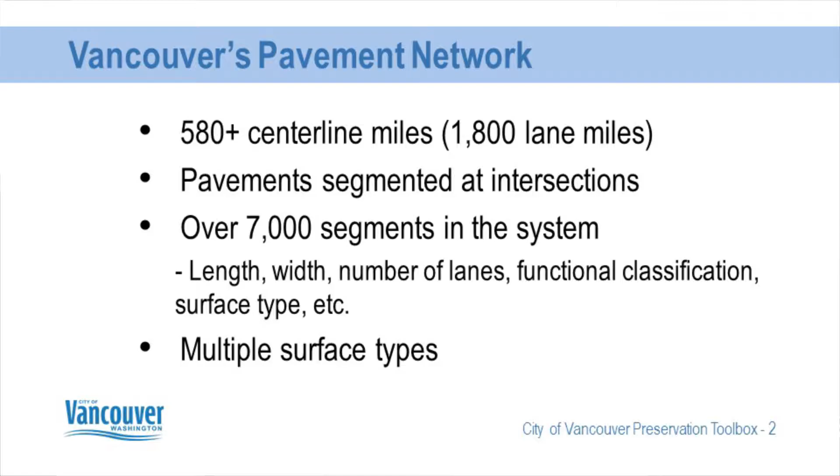Instead of like a route milepost, we do intersection to intersection in the city. It's just easier for us to manage our system that way. Because of that, we have approximately 7,000 segments and multiple surface types, but the majority of our surfaces are asphalt. We're like 97% asphalt. So just to talk about our pavement program in general, to try to tailor a little better with the topics, how they're presented.

We've used multiple pavement management systems over the years. Currently, we're using StreetSaver. The Hansen Infor, we tried that a few years back. Our Public Works uses that as their maintenance management system. It does some general analysis for the assets, but it just wasn't robust enough to have the long-term forecasting we needed for asking for additional money.

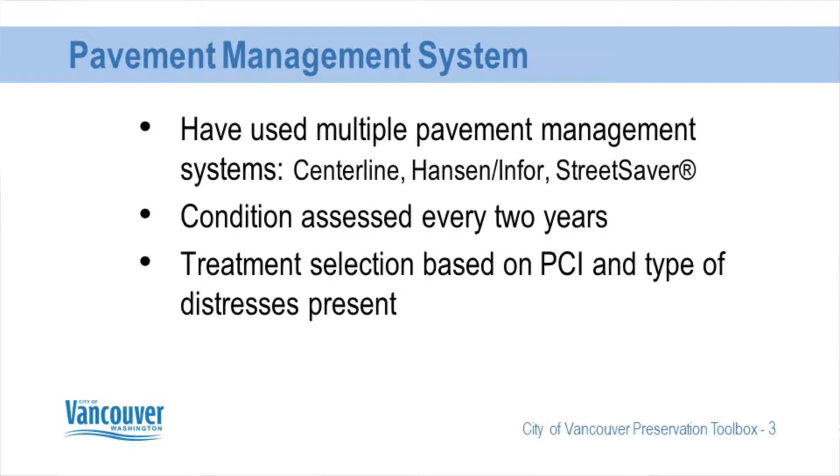We assess the condition of our streets every 2 years, and basically our treatment selections are based on the PCI. As I mentioned a few minutes ago, we don't do IRI or get some of the roughness numbers to select our streets, so we're really using predominantly the PCI, and then we take a look at the distresses when we get a little more into the weeds with it. But structural data, things like that, we get more on a project level than a network level.

So just for a frame of reference for our program, in '17 we actually got additional funding for our program, an additional 3.6 million. So we have 10.4 million this year, which included that additional funding. With that, we did a whole lot of ramp work because in the city and urban area, sidewalks are a big deal. So out of that 10.4, we spent roughly 1.6 million on ramps this year. It took a good chunk of our budget, but it's just part of doing business anymore.

23 lane miles of it were rehabilitation work, which would be related to any kind of overlays or any kind of asphalt on the ground for us. And then 115 lane miles of preservation surfacing type work.

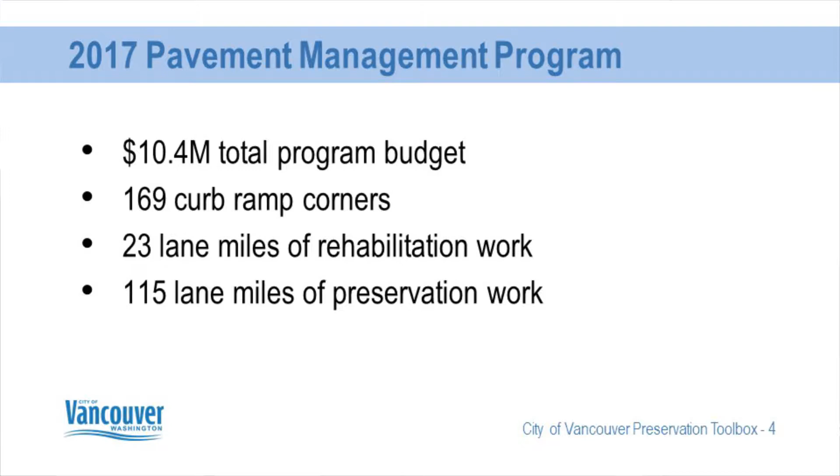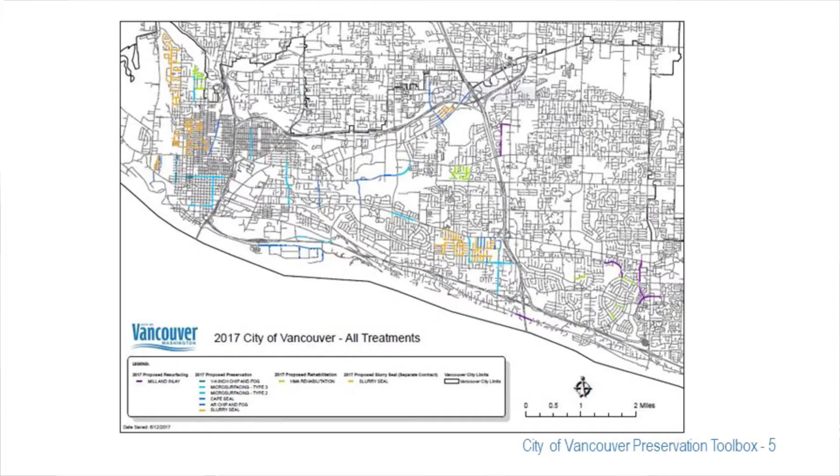The next slide is really just a map of the city and a little bit of a view of where we did work. It's kind of hard to read, so if you've been to Vancouver, maybe you care. If not, it's just a map, but we try to spread our work around through the whole city as much as we can.

We really try to split our system into east and west of I-205, and we do our preservation treatments typically on one half each year, trying to group projects together to make it more productive for contractors coming into the area so they don't have as many stockpile sites and whatnot.

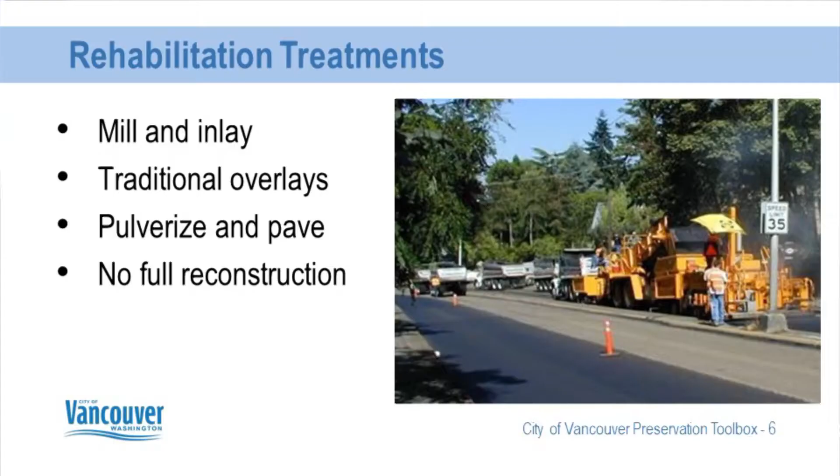To talk a little bit about our rehabilitation, we do traditional mill and inlays, overlays, some limited pulverizing and paving, mainly on residential streets right now. We've got a lot of old, thin asphalt streets that need work, so we do that on those versus our arterials. Currently our program is not based on full reconstruction of our roadways. We talk about worst first, what's going on with that. In a few years we'll start getting to that.

Our funding really is set up so that 10.4 million has the goal of trying to maintain our condition over time, with a slight bump as we move along to increase the condition of our system. Because prior to that we had about 7 million, and we maintained our arterials, but as our Public Works director called it, we had the streets death panel that oversaw the slow bleeding deterioration of our system over time. So with this additional funding, we're maintaining.

So what preservation tools have we used? We've used a number. Apparently, we've got some catching up to do with the city of Roseville to get to the number of treatments they've tried, but we've done traditional slurry seals, microsurfacing, chip seals, cape seals, and a few other treatments that we've either used or are looking at using in the near future.

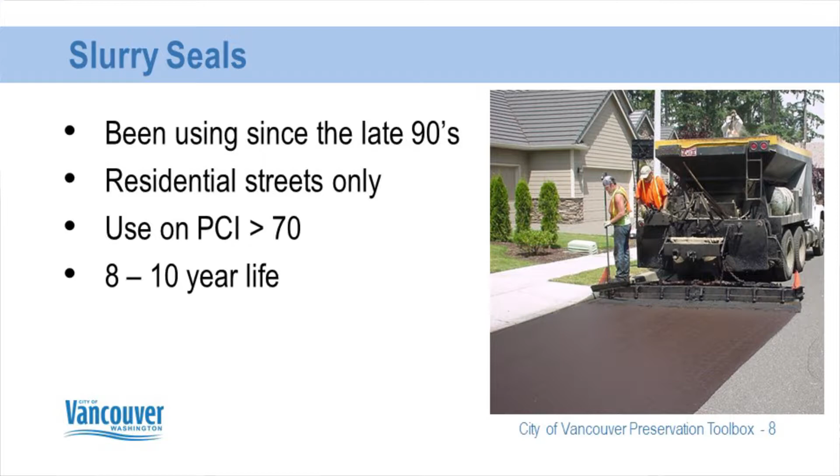With slurry seals, we've been using that the longest. Been using that since the late 90s, residential streets only. We tried them on some arterials, but just with traffic and whatnot, the slurries wouldn't hold up to it, wore through, weren't successful. So for a number of years, it was either a slurry on a residential street or some kind of paving on our arterials.

While we have used it on streets that are much lower than a 70 for our PCI, really for us, ideally to get the life and the amount of prep and whatnot, 70 is our target range, kind of bottom end, where we use slurries. And in terms of the overall life, 8 to 10 years is kind of what we plan.

Because of funding and how long they've lasted, they really go beyond 10 years a lot of times on residential streets, just because of the amount of prep we do in advance and because there's hardly any traffic. But our goal is now to really get into that 8 to 10 year repetitive cycle to stay on top of our pavements now that we have the additional funding.

Microsurfacing, we started using that in 2009, as just mentioned. Prior to 2009, we had slurry and paving in our toolbox. We were looking at something on arterials that we could use, some kind of preservation treatment. So we looked at micro as an option. We worked closely with the contractors.

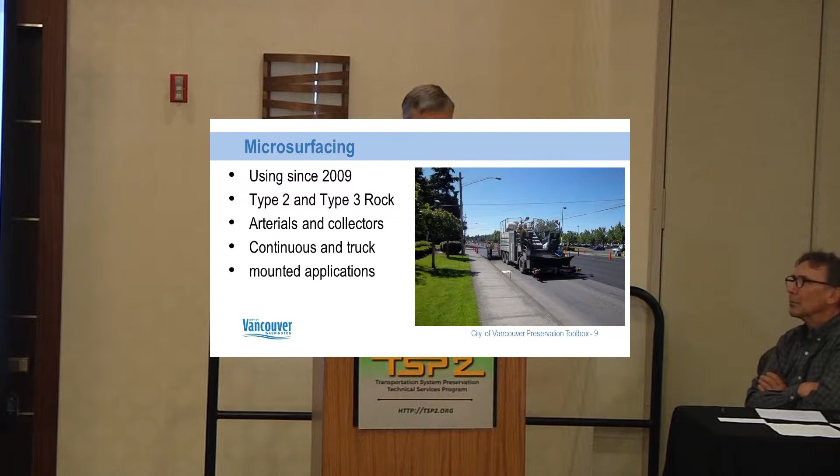I think John Coplans had mentioned yesterday that 20 years ago or whatever, someone tried micro in the area and it pretty much killed it for that time being. Well, the city was part of that before I came along, but definitely hesitant to use it. So we started in 2009, had pretty good success, and since then we've been using it regularly as part of our preservation program.

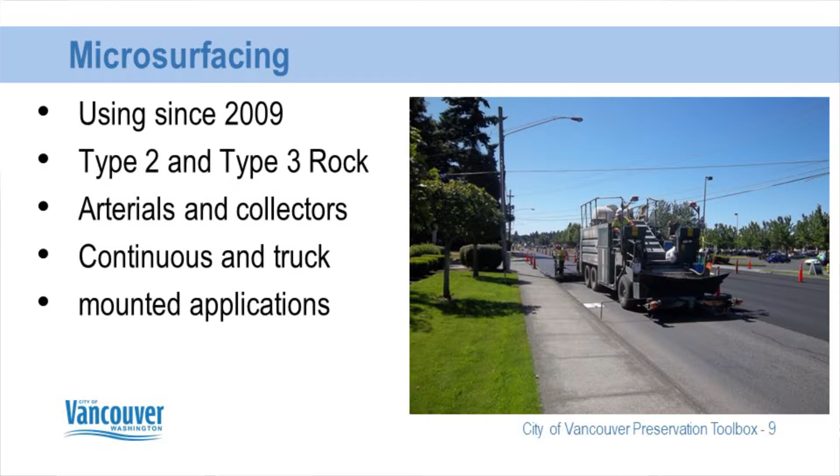We use both a type 2 and a type 3 rock, depending on the traffic and loads; the type 3 goes on our busier arterials, where the type 2 typically goes on our collectors. We use both a continuous and truck-mounted application. Typically on the major arterials, we spec out the continuous run machine, trying to avoid gaps, starts and stops. We tend to run a longer train, longer segments of roads together.

So talking about ADT, the one pictured here is about a 16,000 ADT. And that's actually the one that we used in 2009. It's still performing well today. I'll get to this one instead of talking about life of it, but running pretty well.

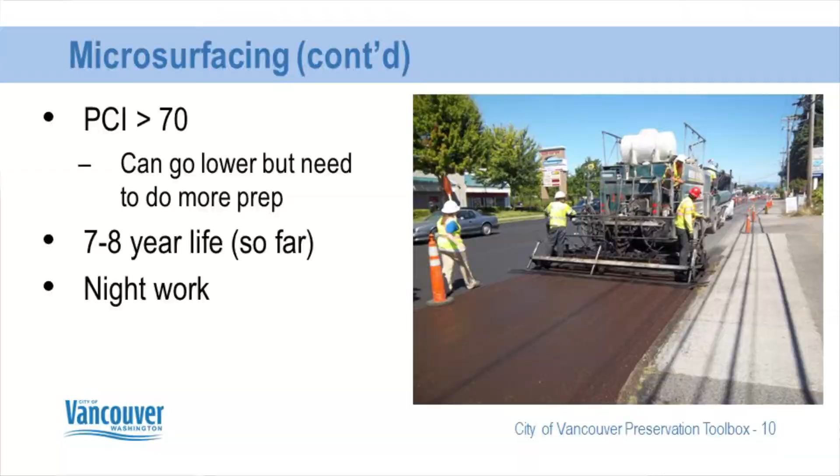We also use it on some as high as 34,000 ADT, and on the right street, it's been effective. It's been holding up well. The one with the 34,000 ADT's been down for 3 years now, and still looks good after checking it out in the last couple of weeks.

What we have found though for microsurfacing is we're using it on a PCI of 70 now. Before, looking at options of what do you do once it gets a little bit past that, but you don't want to pave it, we really pushed it, especially early on, using it on streets as low as 60. Those definitely are not performing as well as the streets where we're putting it on the correct street.

So I definitely would stress that if you're trying something new, make sure you're trying it on the right street. We knew we were accepting some risk, but we were looking for something in between. So as noted, if you go lower than a 70, you're going to need a lot more prep to make it successful, but it can be done if you are really limited in your toolbox. So for us, we've had them down for 7-8 years now. So far, so good. I've only had a couple issues.

Someone had mentioned it earlier today about getting warranty work done. We had an issue on some stuff that was placed last year. The contractor working for us was very responsive, came up and fixed it this year. It was really an isolated spot. It wasn't a widespread system thing. But anyways, for us, so far so good.

And then another kind of general note too with this, since we're doing the micros on arterial streets, normally we have an ordinance that says you can't do night work. Well, in this case, we make the exception just because it's so much easier for traffic control, impacts to the public by doing the work at night, especially on the busier arterials.

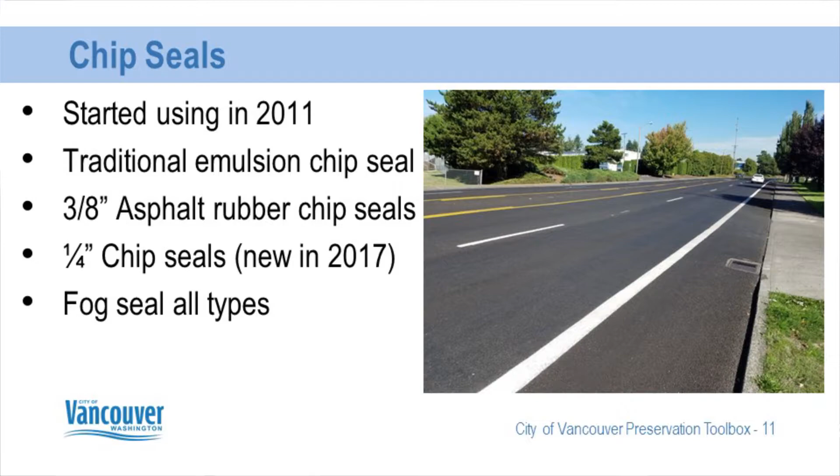That was kind of our trial run to step into looking at other treatments, which we then moved into the 3/8-inch asphalt rubber chip seal, which we started as part of a cape treatment in residential areas as the base layer, getting our feet wet in that. But looking at how well that went down in residential areas, we started looking at where can we find a tool to bridge that preservation, score a 70 or whatever down, doing something before we get to needing to overlay it, where we started applying this on arterials as just a standalone treatment, just a chip and not part of a cape. And so that's been successful to date for us. I'll get to that in here.

And then this year we also tried a 1/4-inch chip seal on a residential street. We talk about the ADA impacts. Not to avoid having to do ramps, but on certain residential streets, especially in the urban area that are 200-foot blocks, if you were to do a microsurfacing that triggers the ramps and you're doing about 3 times as much in dollars in ramp work as a treatment, we're looking at that balance of what makes sense. We're trying to preserve the road. So we're trying out some 1/4-inch chips to look at another tool to find that bridge between a slurry and a full overlay.

And then with all of ours within the city, to help keep rock retention and make it successful, we're fog sealing all of our chips to help that retention, make sure it's all black when they're done, and have an overall product, again, trying to limit our risk so we don't get in that situation 20 years ago where a bunch of people complain because of loose rock, and we lose this tool as an option.

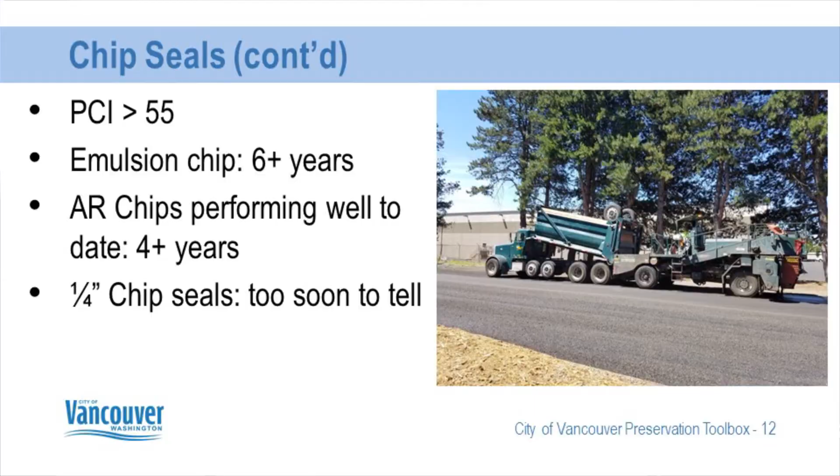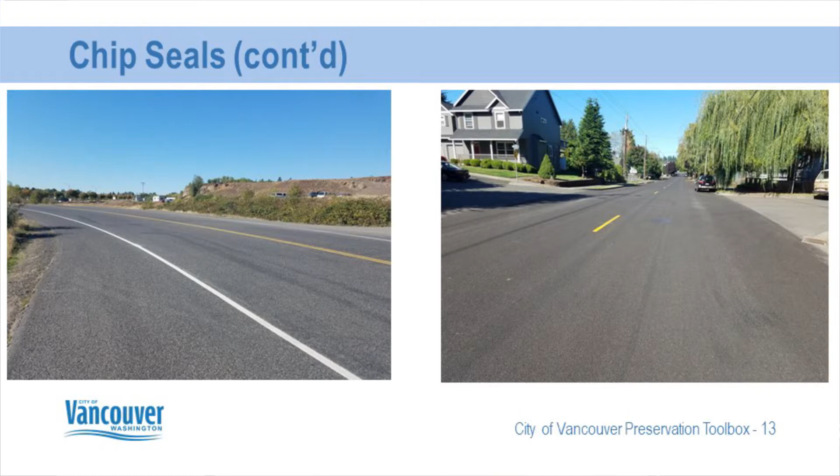There's about, let's see, I put my notes on the wrong one, about 9,000 ADT on that road on the left. So pretty good. We're not getting a lot of flushing. We have noted we've tried to push that 3/8-inch on a higher ADT, and we're seeing a little bit of flushing. So that's something to take into consideration when you're looking at it, the size of rock you're using. In the urban area, I don't think we can go to a 1/2 inch, but I think in some cases we need to look at it if we want to use that on higher traffic roads.

And then the one on the right is the 1/4-inch chip street that we had done this year. So cape seals, we started using in 2012, really as a way, before we had funding, of trying to get into neighborhoods to try to figure out how to do something in there. That was a lower cost than paving just because we didn't have the funds. So that's really where we focused it. We have since then done some on arterials as well. So that's why we use either a slurry on the top or a microsurfacing, depending on the type of roadway that we're placing the cape on.

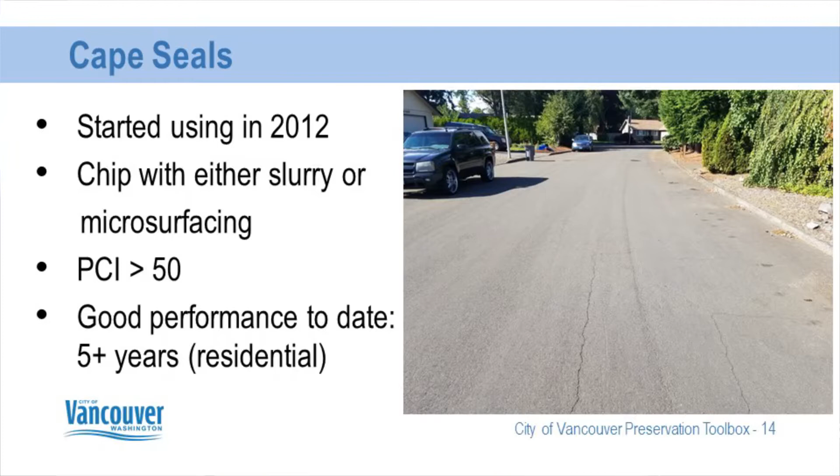We're looking now for us at PCIs of 50 or above. Initially, we used them on ones as low as 35. You had to do a little bit more prep, but so far, like this street here that's in this picture was one that was probably down around 35 or 40, and this is a picture this year. I have another picture, I think it's on the next slide, of a similar street.

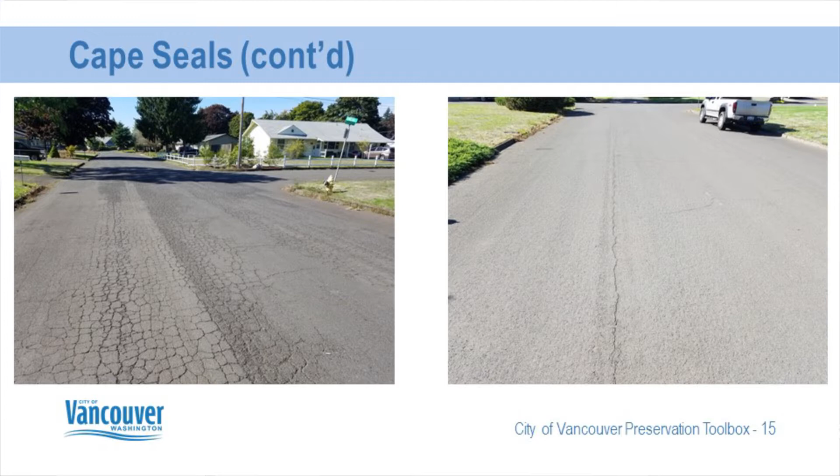So then the picture on the right is what that street, basically right next to it, looks like now 4 years later. So it started on the left, 4 years later, it looks like the one on the right. Again, pretty good bang for our buck in terms of what we're getting.

Just to kind of wrap up on other treatments, we've done a few double chip seals where we've done double asphalt rubber chip seals on highly alligatored, spalled edges. It's kind of more of a happenstance where we put it down and you can still see the cracks and the joints. They were like, well, let's just throw something over the top of it. And it covered those up, and we put a slurry over the top, and it's performing great. Again, part of it is it's in a residential area, so limited traffic. But again, something that we're keeping in our toolbox.

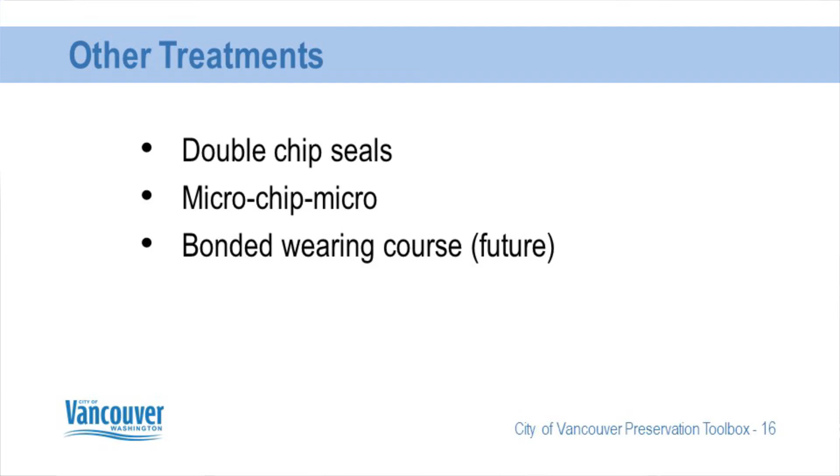We've also done some sandwich or 3-step treatments, depending on who does the presentation: a microsurfacing on the bottom, a chip seal in the middle, and then a microsurfacing on the top. And next year we're looking at trying to do some bonded wearing course, and I think it was a Novachip, I think is what it was called back in the day. I've seen that term out there. So we're looking at doing that starting next year. So this was kind of an example of that, the micro, chip, micro.

This is an old concrete highway, used to be the state highway, east-west highway in Vancouver. A lot of panels. There's no doweling between the panels, so they're all just loose, moving. The panels are disjointed. It's highly cracked. It's quote-unquote a bike route, not a good bike route. But I needed to look at doing something just to try to improve the ride quality in general. So we worked with, again, the contractors that came up and had been working with us in the area on ideas.

So we thought we'd go with this microchip micro. The micro initial course went down to kind of try to level out some of the joining, some of the low areas. We put the asphalt rubber chip in the middle. Again, kind of try to get something to make sure it stuck and came down, add some flexure so the cracks didn't come back through right away. And then another micro on the top for that kind of ride wearing course.

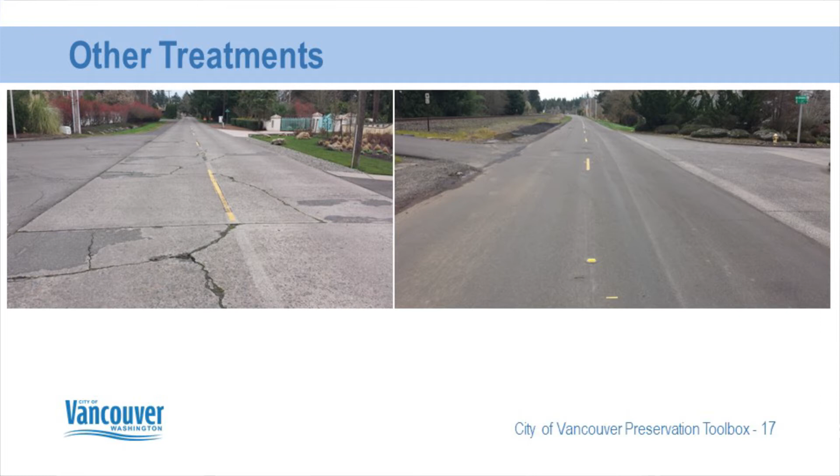And went from, like on the picture on the left, the PCI probably, if you scored it, would have been down in the 40s. Right now, I think when they last scored it, it was about an 80. So you can still feel some of the irregularities in it, but 3 years into it, we're seeing pretty good performance on that.

Now, as I told last week, unfortunately, the neighbors down there, it's down along the river, a pretty high-end neighborhood. It wasn't smooth enough. They could still feel a bump. And so we're going to be paving and doing some work over the top of this. This cost us about $10 a yard to do, and instead we're going to be spending $35 a yard and taking about 3 or 4 times as long to get it all done.

This is Gary Hicks, are all your cape seals asphalt rubber? We have a few that ended up being the emulsion chip, but almost all of them are the asphalt rubber. Okay, thank you. Was that micro hot rubber? Yes, it was a hot rubber. It's what we had in our contract at the time. Again, we were minimizing our risk, so we wanted to do something we felt comfortable with that increased our chances of success to theoretically keep doing it again, even though we're not.

So I'm jealous. I've been wanting to do one of those for years, man.

And then the other thing, those are some beautiful roads. Have you gotten any pushback on the chip seals from the cycling community? Not too much, because we haven't really put them on roads that, even though I think the first picture I had had a bike lane in it. This one here, it's a bike lane, but it's not very heavily trafficked. So we haven't, but we're looking at pushing it towards streets.